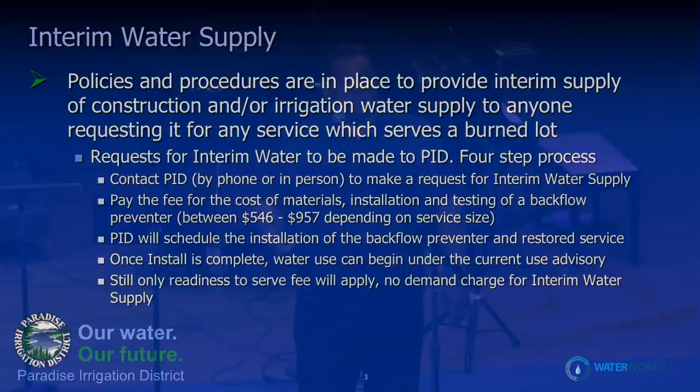And still only the readiness to serve fee will apply - there will be no demand charge for interim water. If you have questions about that, you can talk to the folks at the district office, but there is a system in place if you have a lot that you're trying to serve with water for irrigation or construction purposes, or like I said, any purpose.

In April, on the PID board meeting on April 17th, which I know a few of you at least were at, we presented a draft of the water system recovery plan. It's a draft. Oftentimes the work that we do, we go through a lot of effort to finalize documents before they're presented to the public. This is a bit of a unique situation because we want to move the process forward as quickly as possible, so a draft plan was presented.

It included 5 major components: temporary water supply, preparation of sample sites, sampling, replacement of damaged infrastructure, and return to potable service. It's a draft, it's a living document, so as we learn more, we make adjustments. We're going to talk a little bit about that tonight, and we're going to probably talk about that every time we get together, about the adjustments we're making and why we're making them.

Just a quick snippet from the recovery plan. There's over 1 million feet of water main in this system that have to be addressed, 10,500 service laterals, approximately 1,400 standing structures that are in the city. The plan includes a plan for prioritizing the work so that we get to the standing structures as soon as we can. The map that's on there is a map of how we were prioritizing per the plan.

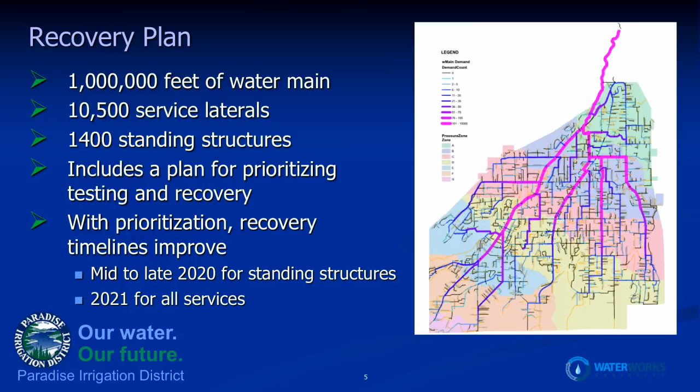That's a very detailed document. The board meeting was, of course, recorded, so if you want to go online and listen to me talk for an hour and a half about the plan, you're welcome to do that. It's super exciting. Or if you'd like to review the document, it's, of course, available on PID's website.

So this is a very technical problem, and everybody here is becoming experts in water systems, whether they like it or not, because you're having to ingest all of this information and try to make decisions for yourself. So I'm going to talk a little bit about some terminology before we go forward, just so that we're all sort of on the same page. It's things that, as water professionals, we're all very familiar with, but there's no reason why you should be as a general public until now - you get to join us in our little lingo world.

So, infrastructure. Paradise Irrigation District owns water infrastructure, the distribution system. It generally consists of mains, which are the big pipes under the streets, service laterals, which are small pipes, generally 3/4 inch, sometimes a little bit bigger, that run from the main to your meter, and then the meter. And that makes up the distribution system. That's what we're talking about tonight, are those components - the mains, the laterals, up to the meter.

Another couple of terms that are probably quite familiar to a lot of people in the room are MCLs and PPBs. MCLs are maximum contaminant limits. They're set by the EPA and by Cal EPA. For benzene, for example, which is, of course, one of the things we're quite concerned about here, the California MCL is 1 part per billion. The federal MCL is 5 parts per billion. Those limits are set on the basis of, for benzene specifically and for other VOCs, chronic exposure, meaning long-term exposure.

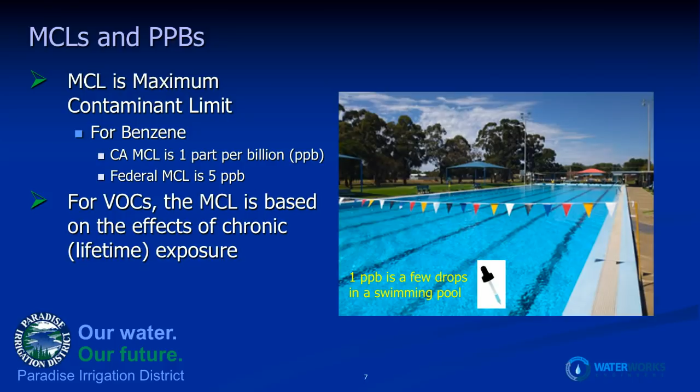The standard is 70 years of drinking water at a rate of 2 liters per day, and what impact that could have on health. In the case of benzene and VOCs, the primary concern is the potential for increased cancer risk at that level of exposure. To give you an idea of what a part per billion is, it's a few drops in a pool the size of the public pool here in town. That's about what a part per billion is.

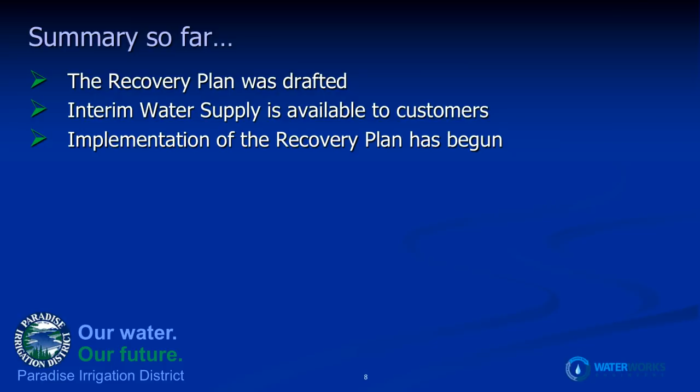Okay, so far tonight, we talked about the recovery plan being drafted, interim water supply available to customers, and that we've begun the implementation of the recovery plan. So what we're going to talk about next is the data that we've gotten from the sampling that's been done so far. We're going to talk a little bit about data and statistics, and hopefully I can walk through this where it's clear to everybody.

So since we last met, PID staff have applied intense efforts in working the recovery plan and taking the steps that were laid out in that plan and discussed during the board meeting back in April. They've been assisted with mutual aid, which is other water utilities helping during times of need. Specifically, East Bay Municipal Utility District had a crew of water professionals here this last week - there were about 6 of them. In June, San Francisco Public Utilities Commission personnel will be here, about 14 of them, to assist in the work to prepare and sample sites and execute the plan going forward.

In early May, that team was able to prepare and sample sites at a rate of about 20 locations per day.

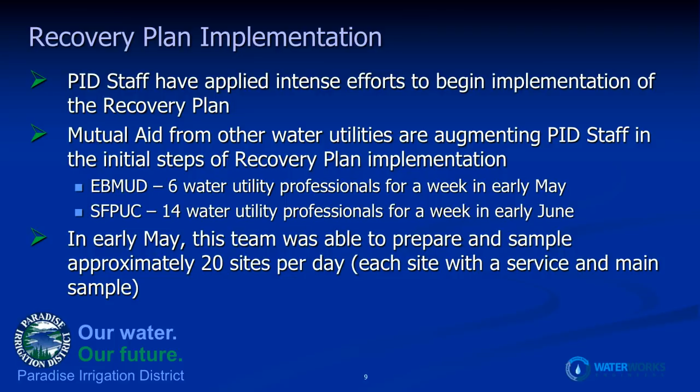So we have a protocol that's outlined in the recovery plan, and further detailed as we've gone forward, on how to sample a home or any standing structure, whether it's a home, business, or public structure. I'll walk through this graphic to talk about what we do to sample a standing structure, and then we'll have a short video demonstrating what that looks like.

The gold standard in sampling a service lateral to test for VOCs is to allow the service lateral to stagnate for 72 hours, allowing any VOCs entrapped in the plastic or whatever material the lateral is made of to desorb from the walls of the pipe and enter the water so we can sample and test them. This has been discussed by many people from different organizations with scientific background, and we concluded that the 72-hour soak is the gold standard for testing benzene and other VOCs.

When we approach a standing structure, we have to figure out a way to keep that service stagnant for 72 hours. In some cases, the structure can have a water outage long enough for us to get that window, usually 4 or 5 days—maybe no one's living there, or residents have the option to leave for a time. If so, we arrange for the pipe to be stagnated, ensure it is stagnated, and once it's soaked for 72 hours, take a sample from the lateral, then run the water a bit to get water from the main, and take a sample from the main. That's starting from box 1.

If the homeowner agrees that a 5-day water outage is possible, that's a yes—we move down to box 6. We install a sample manifold, and after it's sat for 72 hours, we move to box 5 there and take the sample.

Many of you living in standing structures here in Paradise find a 5-day water outage impractical, for sanitation or other reasons. So to accommodate that, we follow the other pathway on this graphic: we approach a homeowner, and if a 5-day outage isn't practical, we go to adjacent services—this could be an adjacent home that's been burned down or an adjacent fire hydrant. We find a nearby location we can stagnate and test to confirm it meets all standards.

Once we know that water meets all standards, we use a hose to hose over—now we're in box 3—from that adjacent service to the home being tested, so they have a continuous water supply. After that's set up and water continues to be supplied, we install a sample manifold at the home or business being sampled, and let it soak for 72 hours. We're back into box 5, and we take our sample.

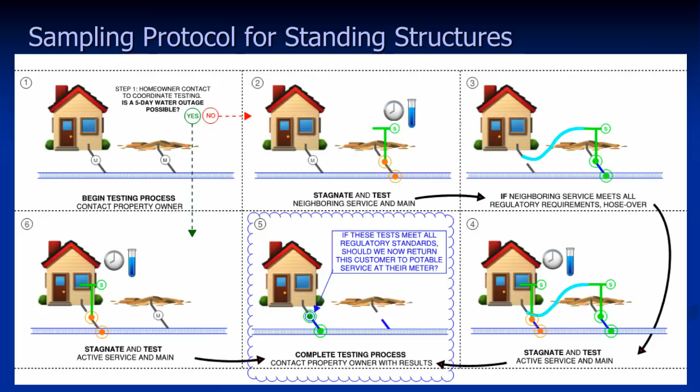So that's the explanation with words and pictures, and now we're going to move on to a video. We worked with our partners at Cal OES—they're here somewhere, the Cal OES film crew—and produced a video to explain how this works out in the field. We're going to play that, and I'm going to sit down for just a minute.

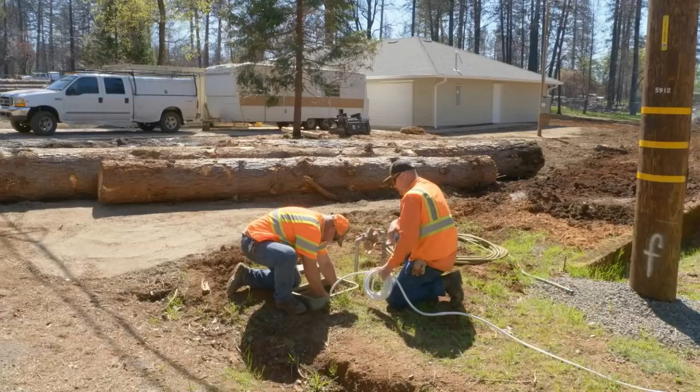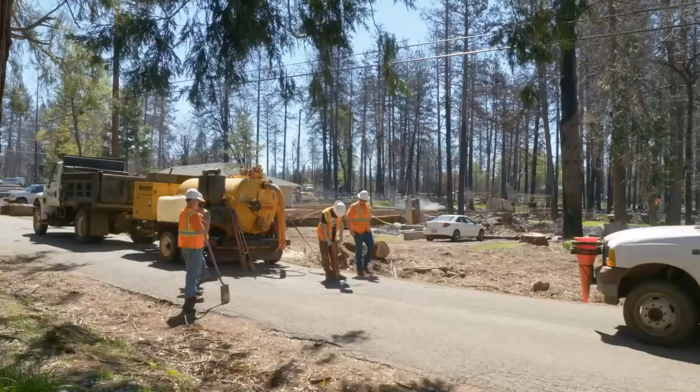The Paradise Irrigation District, with the help of our colleagues at Waterworks Engineering, based in Redding, is undertaking the unprecedented task of repairing our entire water system in a way that enables us to address our two most critical needs simultaneously. By targeting the areas with the highest concentration of undamaged occupied structures, we at PID are getting potable water fastest to those customers. At the same time, we are actively identifying and performing, when possible, the repairs essential to recovering the larger water system.

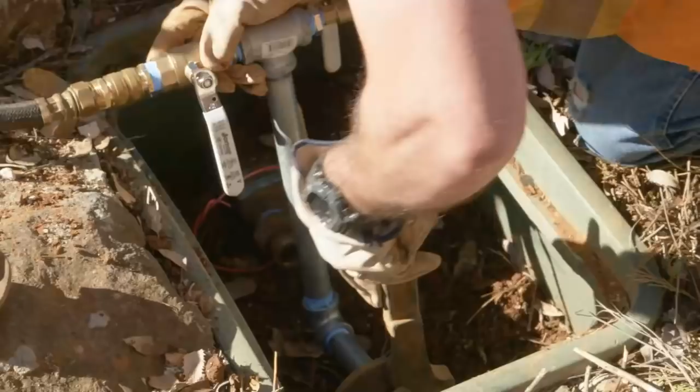Once an undamaged home is identified for testing of its water service line, PID's focus shifts immediately to an adjacent destroyed property where we attach a sampling manifold to its meter service line. Performing the test at the unoccupied property prevents the neighboring occupant's service from being disrupted during the 3-day wait period before the sample test can be drawn.

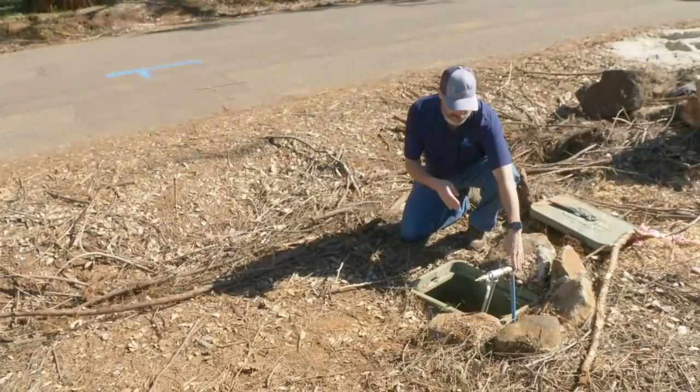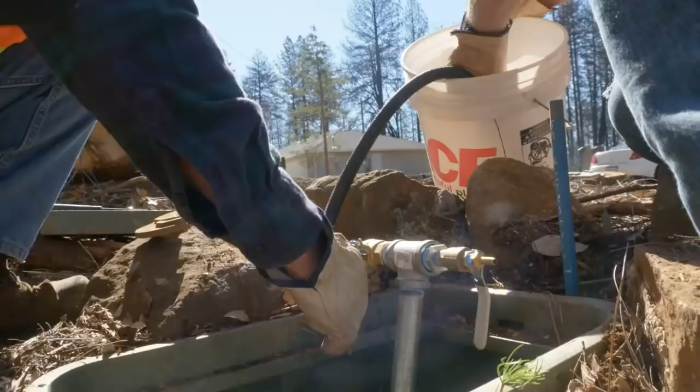Waterworks engineer Michael Lindquist explains: The sample manifold allows us to take a water quality sample from the service lateral pipe from here to the street. We take that sample after the water has stagnated for 72 hours, which gives ample time for any contaminants absorbed into the pipe to leach back into the water in the service lateral. From the same location, we can also sample the water quality in the main pipe by flushing all of the water out of the service lateral and taking a second sample, which represents the water in the main pipe.

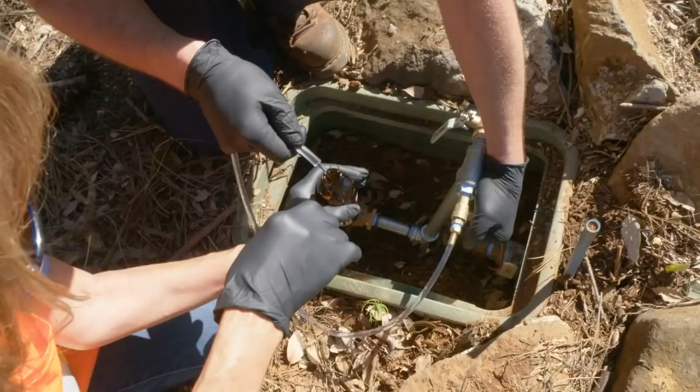At each location, we're going to take two samples. One's from the service lateral, the other's from the main. This first sample is from the service lateral. Second draw, we've got main water now.

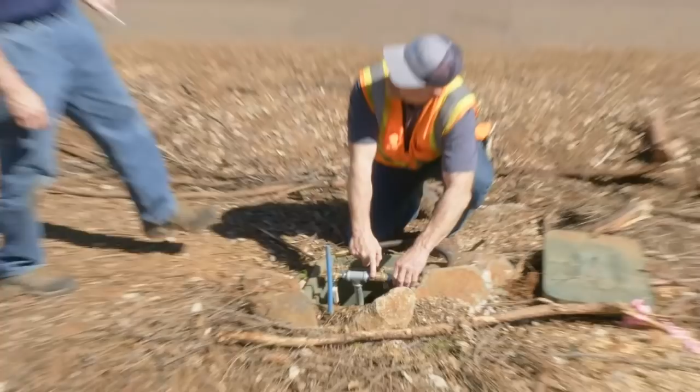Hey Jim, it's Michael. The test results came back for this service lateral, and they're non-detect. Outstanding, so we have no contamination in this service lateral. So what might be the next step that you're going to do here?

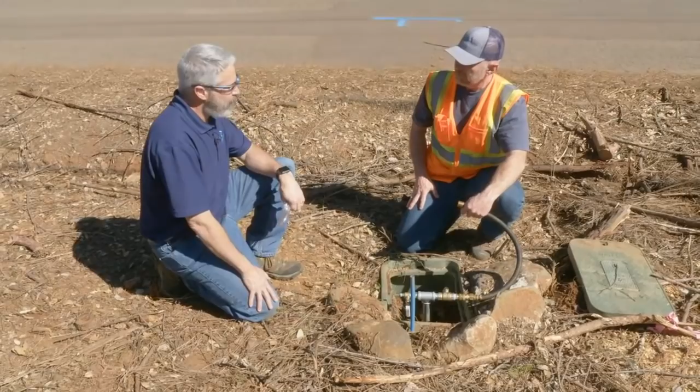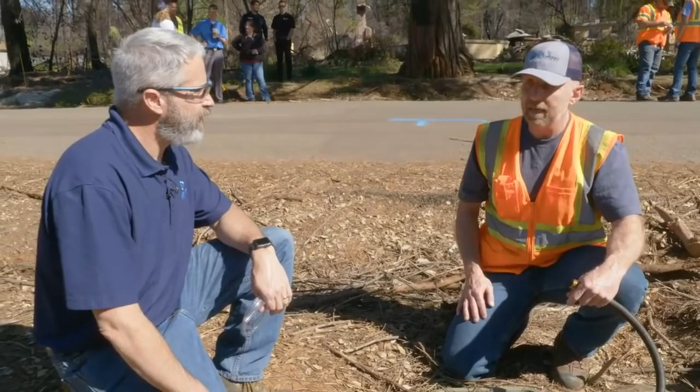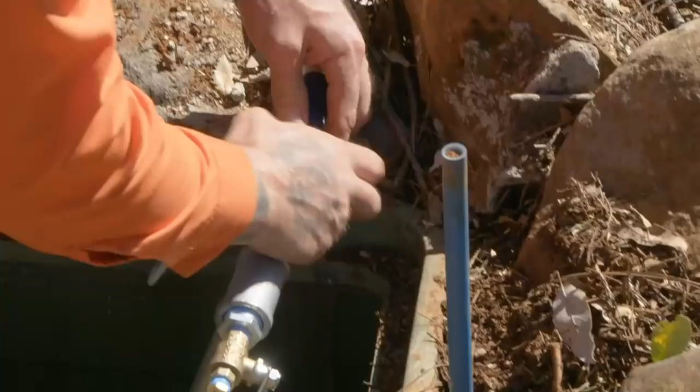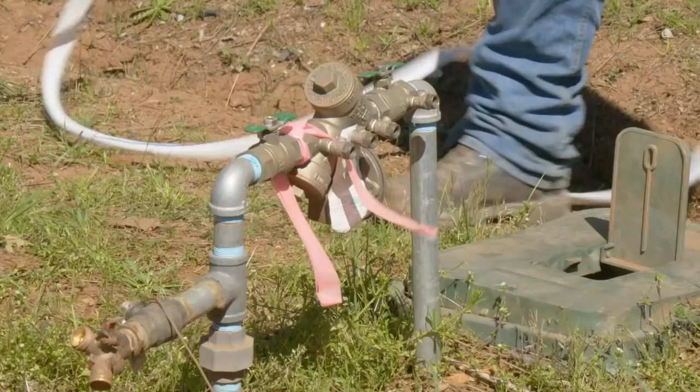That's good news. So now we are looking at having to sample a standing structure. In order to sample the standing structure, we need to be able to isolate it. In order to isolate that standing structure for the stagnation period, we need to provide them with water, because we do not want customers to be without water at any time. So we will utilize this line, now that it's come back non-detect, as the supply line for the standing structure, and we'll utilize a hose going from this apparatus to their service line, to the customer side service line on the standing structure. We'll give them water, and we'll set up this same apparatus on their service line, and sample them in the same manner that we sampled this one.

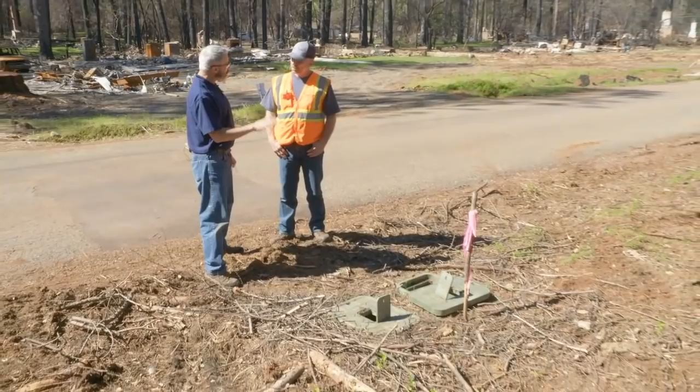But what happens when the sample results for our customer service line come back showing the presence of contaminants? We have a plan for that too. So Jim, the test results for this particular service lateral showed a contaminant level above the MCL. What are the next steps that are going to occur for this service lateral?

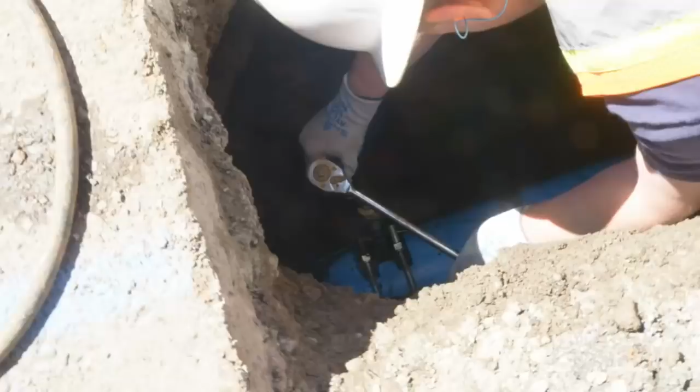One of the first things we want to do whenever we encounter any kind of contamination is to limit and isolate that particular portion of where we found the contaminant. The method for doing that is to excavate in the street at the water main. We will isolate at the corporation stop, the valve that we use to shut off and isolate that service line from the water main.

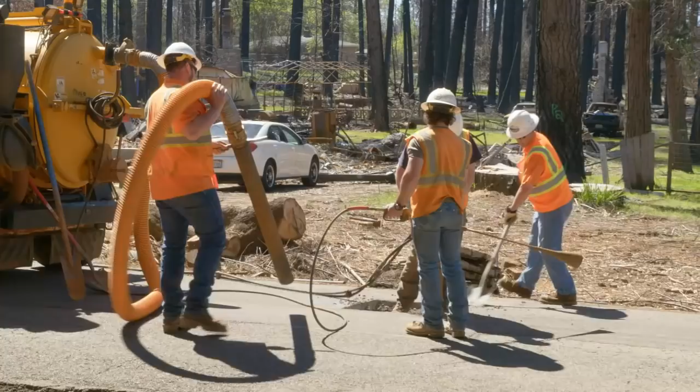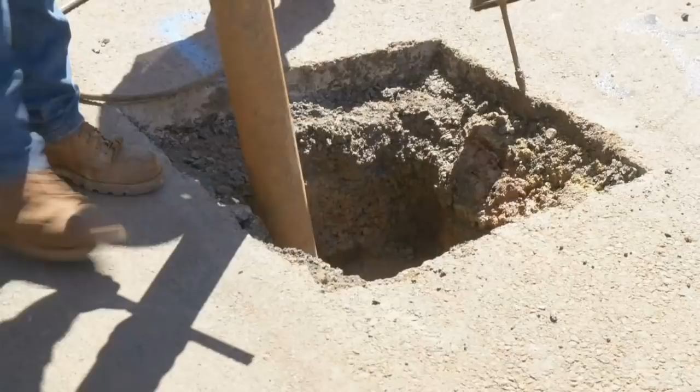Overall, our plan puts you, the customer, first. We're getting potable water to Paradise's surviving homes and businesses as quickly as possible while avoiding the inconvenience of a customer being without water service during the necessary 3-day stagnation period. Although this plan is more efficient because it uses far fewer resources, the timeline for completion of repairs is extended slightly. The trade-off is that between the tireless work of the contractors and the generous mutual aid, PID personnel can more immediately get back to the business of serving our customers in the way you were accustomed to before the fire.

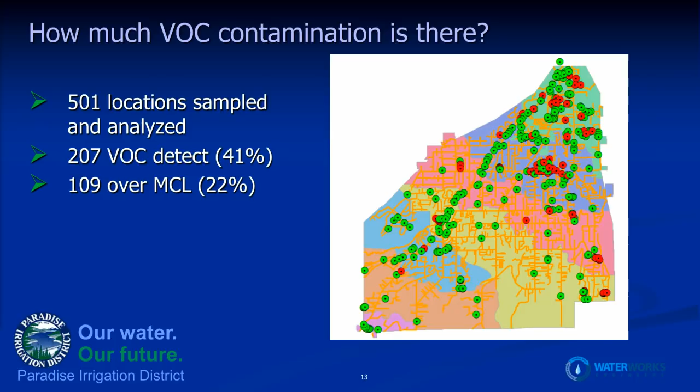So we looked at all of the data, but now we want to look at the data in each of these three categories: standing structures, burned structures, and mains. First we're going to look at just the raw data.

This is the data from standing structures. The vertical axis there is parts per billion, or micrograms per liter, which is the same thing. You might hear people say micrograms per liter—it just means parts per billion. And the horizontal axis is just the number of samples taken. Remember, there were 63, so there's 63 data points on there.

The blue lines—the bottom blue dashed line is the detection limit. Below half a part per billion, the laboratories can't detect benzene. This is for benzene. The next blue line is the California state MCL, maximum contaminant level for benzene, which is 1 part per billion. And the next blue dashed line is the federal 5 part per billion MCL. You can see the data there, and the vast majority of it was non-detect for benzene. We'll talk a little bit more about those data statistics.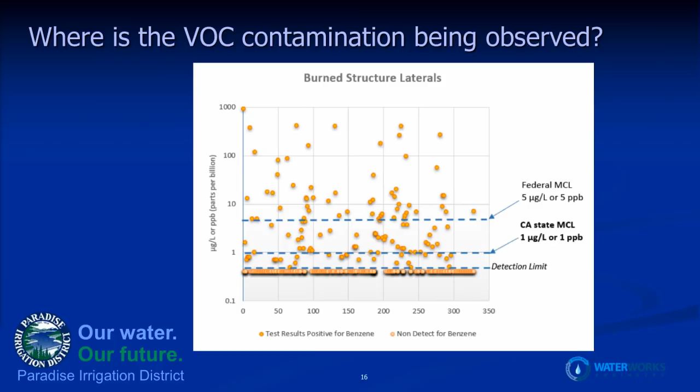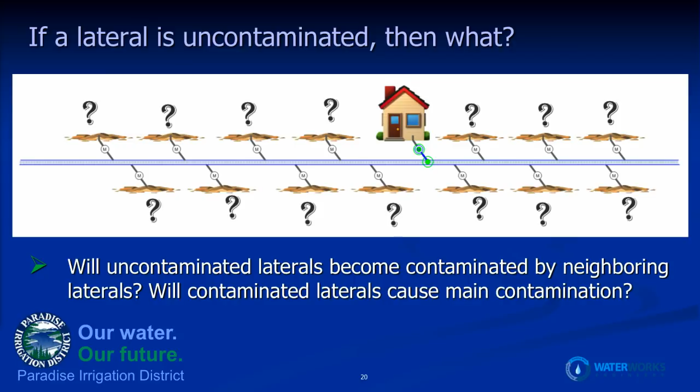So this brings up a question. If we measure the water going to a standing structure and it's uncontaminated, we've taken a sample of the lateral, a sample of the main, and found that it meets all requirements, all MCLs, it's potable water by all standards. Then what? If we haven't tested the other lots around there, the burned lots, and we know that burned lots seem to have a fairly high propensity for being contaminated, will those uncontaminated laterals become contaminated by their neighboring laterals? So we have to ask that question. As a community, as a consultant, as a utility, we have to ask that question and sort out what the answer is. Will contaminated laterals cause main contamination?

So the first thing we talk about is, we were doing some math and statistics. Now we're going to do a little chemistry. The first potential way this could happen is contaminant dispersion, the movement of contaminants through the water. In this case, if all of those adjacent service laterals were contaminated, and clean water is running through the main, could that contamination bleed into the main and cause enough contamination so that the person using the water coming out of that main is exposed to non-potable, contaminated water?

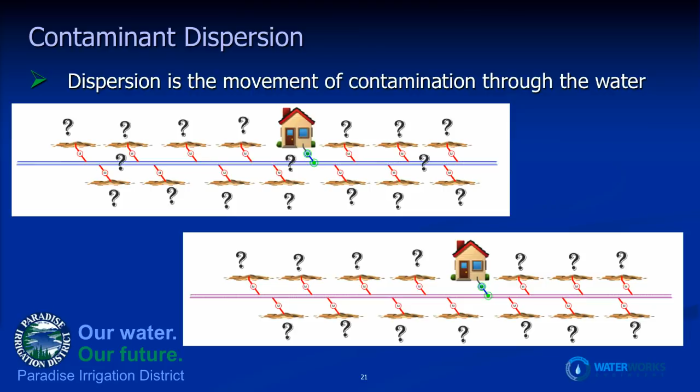That's the first question we want to answer. So we looked at dispersion modeling, mathematical modeling of the dispersion behavior of these compounds in water. We used a methodology developed by the Division of Drinking Water and adapted it to this particular location.

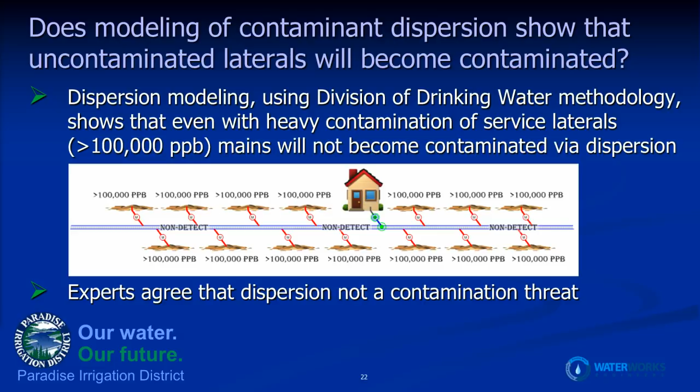Using that methodology, even if we have all of the adjacent lots at over 100,000 parts per billion, right? The biggest thing we've measured is 900. The worst burned lot so far is 900 and change. I think the worst they saw in Santa Rosa was something on the order of 40,000, and that was one sample. So we said, okay, what about 100,000? Just the worst thing that's been seen yet. Still, if every adjacent lateral had 100,000 parts per billion in the entire length of that lateral, and it was leaching into the system, the main water would be non-detect for the mains in this system, per the mathematical modeling.

Experts, Division of Drinking Water, the folks over at Purdue, we've had discussions about this to substantiate our calculations that dispersion shouldn't be an issue. They agree with the way we did it. They agree with the conclusion we came to. Next slide.

Yeah. All right. Are you a shill? I think he's a shill. All right. Our audience plant. Set up the next slide.

So the dilution is the next question. So if we have that same neighborhood, all of those lines are contaminated, and we have a depressurization event, okay? There's a number of things that could cause a depressurization event where the water flows backwards. You lose pressure in your house, the water flows backwards into the distribution system, and it sucks the water out of every one of those contaminated laterals and mixes it all up and then reverses it. In that case, could we have a problem with contamination? And the answer is yes, we could.

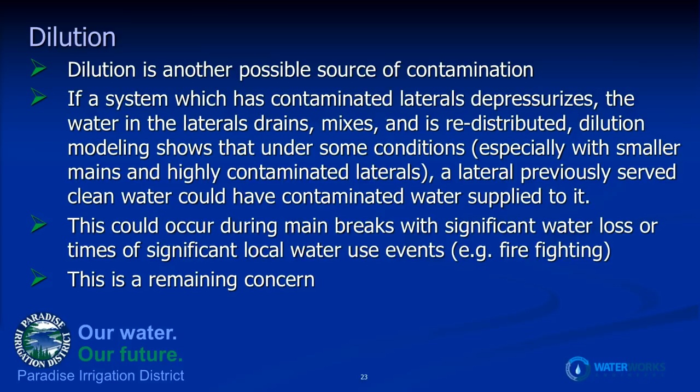This is a remaining concern. This would occur during main breaks with significant water loss, or significant local water use, like in a firefighting event. It would be a situation where you would lose all pressure in the house. No water would be coming out of fixtures, which would mean your neighboring lots would have potentially water flowing backwards into the system.

So if a main is broken and water's gushing out and it's pulling this contamination in, that could happen. Or if several hydrants are opened at the same time during a firefighting event and the pressure suddenly drops in a small zone of the system, then there's the potential that contamination could move from adjacent lots into the mains. It would be in the mains and then potentially distributed to people living in those standing structures. So it's a concern, and we'll talk about how we're going to address it.

So the original plan, presented at the last board meeting, was to test all services and mains before returning any of them to potable service. It's the most conservative plan. It'll take several years to complete. And while it is conservative, there's no such thing as 100% certainty in this world, including that plan or any plan. The current thinking, based on the data we've seen so far, is that once a service is tested and the main is tested in front of that service and those have tested non-detect, we can return that service to potable use.

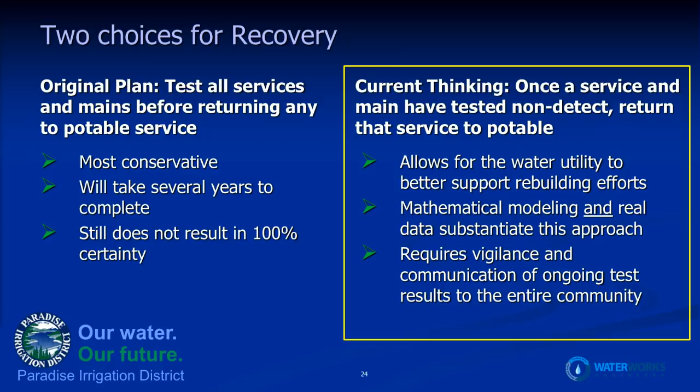This allows the utility to better support the rebuilding process in terms of schedule. It's supported by mathematical modeling and the real data that we're seeing, but it requires vigilance for times when contamination could re-enter the system, and communication of ongoing test results to the community. So we'll talk about that a little bit.

So under this current thinking from the utility, the conditions for returning a lateral back to potable service are that the lateral and the main test at that lateral are non-detect for VOC. The main in front of it, so we've got a clean test, and you might even see that on the website, but that's not the end of the decision-making process. We want to look at the hydraulic conditions that exist in the distribution system in front of that location. So the main that's serving that house or that business or that public building, if that main has flow through it, then we feel more confident that the chances for any kind of recontamination are much, much lower.

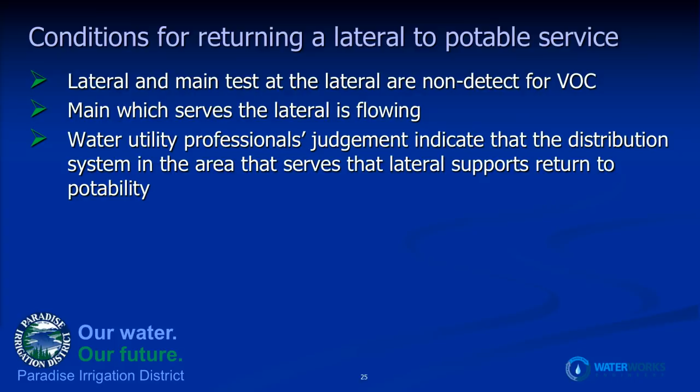And we use the judgment of the water utility professionals that are here on the stage and others to make the decision about whether to return a service to potability. So it's not just a clean test, it's also some judgment about where that service sits in the distribution system and what the likelihood is that they would get exposed to potentially recontaminated water.

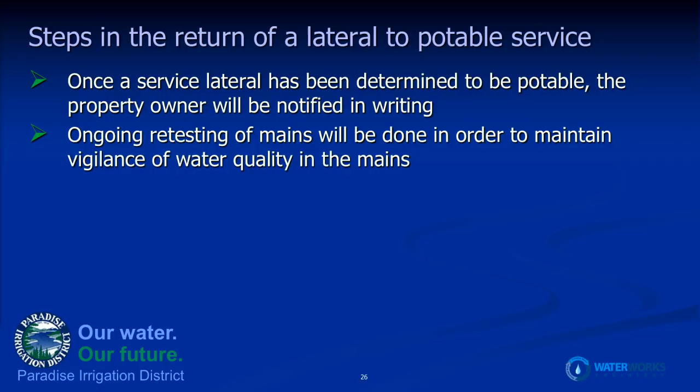There'll be a specific letter to each customer, and then ongoing retesting of mains will be done to maintain vigilance of water quality in the system. So it's not just going to stop at the one test. There will be continued testing throughout the system to characterize the behavior of the contamination.

So there are some possible conditions for rescinding potable service. Just like before the fire, there were conditions under which the district rescinded potable service. Certain events would lead to boil notices or other types of communication to the customer base.

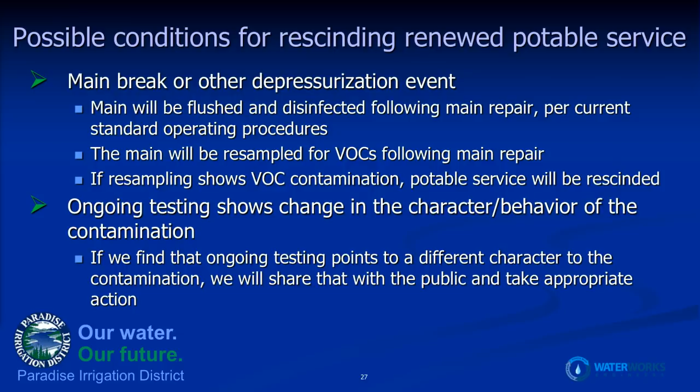Now we have an additional concern, which is VOC contamination. If there is a main break or other depressurization event, that main will be flushed and disinfected following the repair, which is already standard operating procedure to avoid bacterial contamination, always a concern during a depressurization event. The main will also be resampled for VOCs, not just bacteria, following the repair. If that sampling shows VOC contamination, that will be communicated to the affected properties and services.

We will let people know there was a depressurization event, there is now contamination in your line. Please return to following the water use advisory on the website, and we will work to restore potable service to your property as soon as possible. We'll go out and start working to sort out how, by either flushing, replacement, or repair, to return those services to potable service.

The other way there could be a rescinding of potable service is if we see a change in the character of the data. As discussed with data limitations, we have 500 locations, 600 plus data points, 800 samples taken. We're going to start approaching 10% of the system sampled in the next month or two. If those charts start looking a lot different than they look now, and we start seeing significant contamination in services that serve standing structures, or significant main contamination in certain areas...

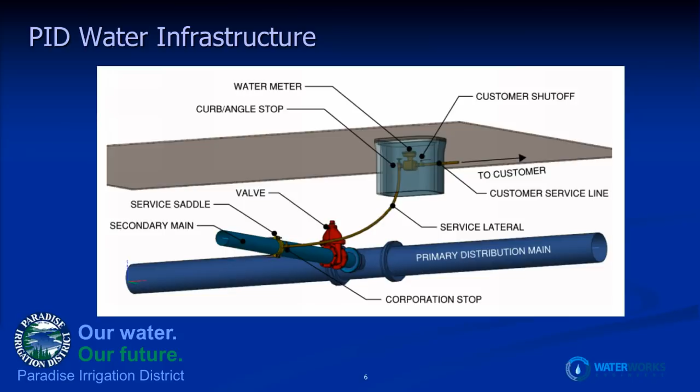So that's the concern: if you have a depressurization event and that water in the lateral gets pulled into the system, it could cause some contamination. It's not a high likelihood, but it's possible, and we want to be cautious about returning people to potable service and transparent about the potential risks.

Second question: why are you testing and sampling burnt structures before all standing structures are tested? It seemed like the focus should be on the standing structures so they know the water quality while living in the house, or so they can reoccupy it.

Absolutely, the majority of the data so far is from burnt structures. As we've progressed in implementing the recovery plan, the majority of new data is directed towards sampling standing structures. Often we're getting a sample from an adjacent burned lot or two or three in an effort to set up the hose over, so some of that data comes from burned lots just because we're sampling for hose overs. But the initial data was generally taken from burned lots at the beginning.

This data started back in December, with sampling and data being taken, and we're looking at all of the data to date. So yes, as we go forward, the majority of the effort is directed towards sampling standing structures, and the data will start to favor that. Next time we meet and I present more data, you'll see more standing structure data and a bit less burned lot data.